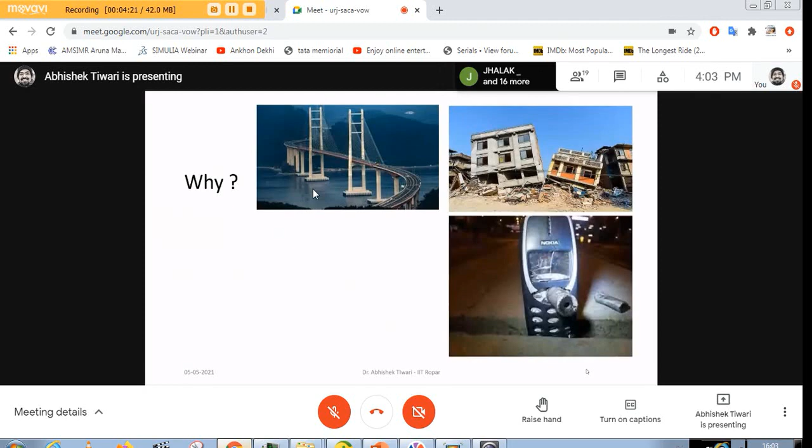Before we try to understand that, the question is why we need to understand about crack tips. Whatever components or machines we make, whether small or big, for example bridges, buildings, phone or bone, everything has some structural component to it and they are prone to fracture. Even semiconductors can undergo thermal strain and can fail. So we need to know when the material will fail and how much time we have to repair it, replace it, or run away from it. This is the importance of structural integrity, and I will share an example with you which is not too bad.

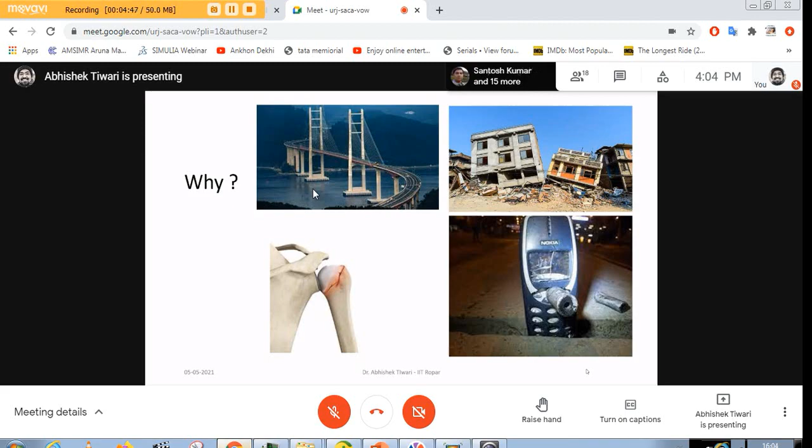A flight on April 28, 1988 takes off from Hilo Airport. This flight used to fly to Honolulu Airport at least 10 times a day because the distance between these two airports is very short, just 350 kilometers away. So it used to hop on and off 10 times at least. And on April 28, after 20 minutes of taking off, the upper frame of this aircraft flew away.

One of the flight attendants, who was 58 years old and on the verge of retirement, was also sucked away into the sky. This was not a very fatal accident because nobody else died, so there was only one casualty. The pilot decided to do an emergency landing at Kahului airport, which is in the middle, and he saved all of them.

So these are the things - not only aircraft, but other components too - where we need to understand that if there is a flaw, what can we do about it and what are our options. In order to understand that, we need to understand the behavior of the flaw. The fail-safe design approach assumes and accepts the idea that there will always be a flaw, or more than one flaw, in the system. And therefore fracture mechanics begins with the idea that we have a crack.

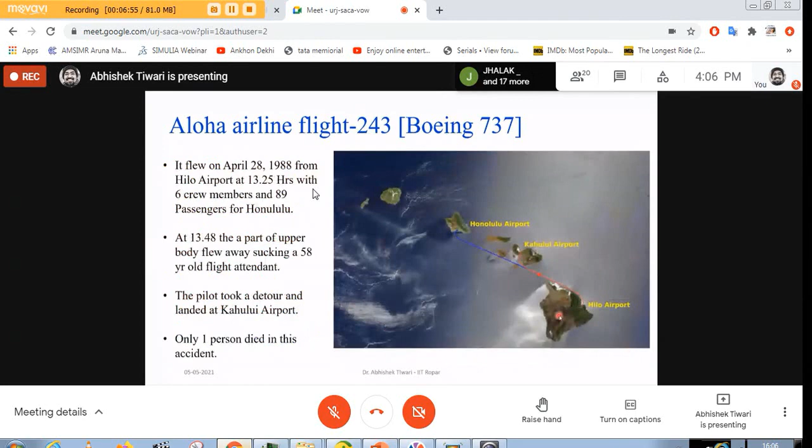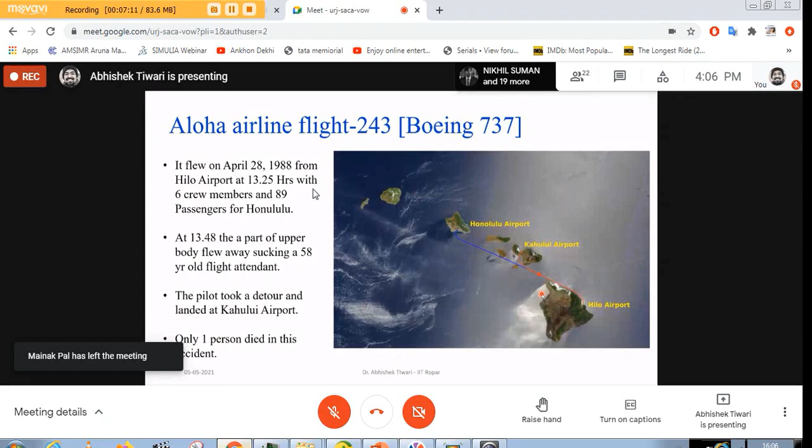So let us look at a little history of fracture mechanics. I didn't explain the mechanism of why this aircraft failed. As I told you, this flight used to do frequent jumps between these two airports in very short duration. Whenever a flight takes off and lands, the cabin of the aircraft goes under a compression and decompression cycle to match the same atmospheric pressure as on the ground, and this causes cyclic loading on the body of the aircraft.

Usually the cyclic loading is on the wings and on the turbine blades. Apart from cyclic loading, we also have higher temperatures in the jet engines. But in this case, the body failed, and it failed because of the compression-decompression cycle. If you look at the amount of flight hours this aircraft had, it was approximately 35,500, and that is not a huge amount of flight hours for an aircraft to fail.

But in this short span of time for which the craft was in the sky, it went through approximately 90,000 compression decompression cycles. And the add-on was the harsh environment of the sea, so you have a lot of salt and moisture in the air which assists the damage which starts because of the cyclic loading. So this is why it happened.

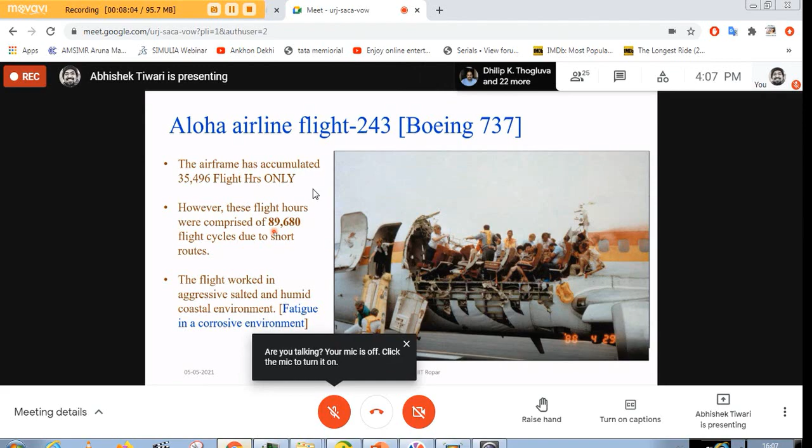If we try to find out the first documentation of any experiment for the fracture of a material, we find it in the notebook of Leonardo da Vinci in the 1500s. In this experiment we have a wire hanging with a bucket, and sand is being poured through a small hole in the bucket. There is a big hole dug beneath the wire so that when the wire fails, the bucket with the sand will fall into it and we will not lose any of the sand. When it fails, we can measure the amount of sand which caused the wire to fail, and then we know the fracture stress.

But fracture is a very common phenomena, so it cannot be true that it started in the 1500s. It is as common as an apple falling on somebody's head, because if the head is not there, it will fall on the ground and it will fracture.

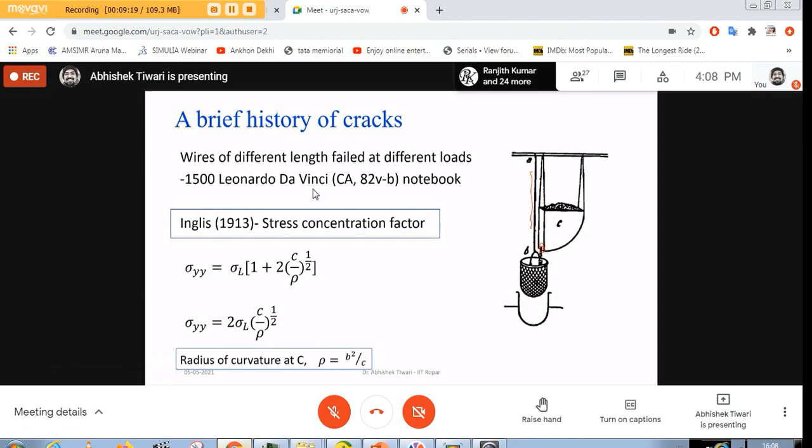But the first flaw-based analysis we find in 1913, when Inglis uses theory of elasticity for a finite radii flaw which looks like an ellipse. This is the flaw in the material which has major and minor radii of B and C. He says that if you apply a load on this structure, the load is concentrated at the tips of this flaw, and the amount by which it will be concentrated is given by the geometry of the flaw.

But so far Inglis is talking about a flaw which is finite, so it is like a hole, not a crack. The usual cracks are very sharp, and for sharp cracks this radii tends to zero. In that case the damage will be severe, so we need to understand what happens when there is a sharp crack.

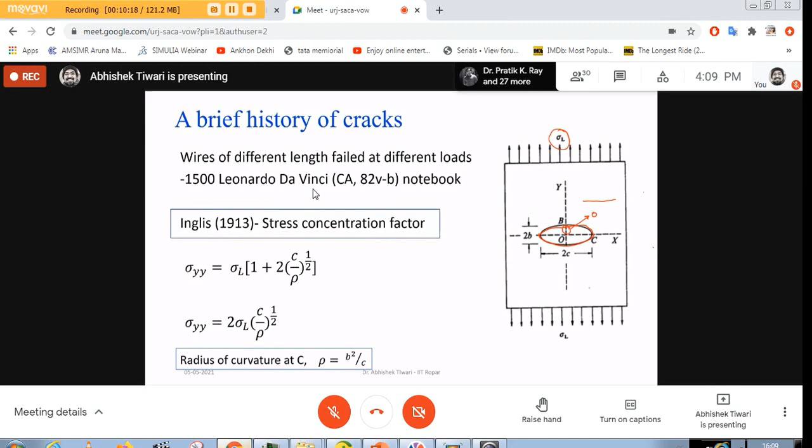And that comes when A. A. Griffith applies the law of thermodynamics in the field of fracture. The idea is very simple, and usually ideas are very simple - it just takes somebody to think and apply it, and that's what Griffith did.

He said that we are applying some amount of energy to the system, and because of this the system is failing. So the energy we are giving to the system is going into creation of two new surfaces. There is a block of material, we apply load on it, and this block breaks into two pieces, creating two new surfaces. In order to create these new surfaces, we need some amount of energy, and that energy is coming from what we are applying.

He equates it and gets the fracture stress criteria. But we already get a signal of what will come in the future - if you multiply the denominator on the left hand side, you get something on the right hand side which is a material property. Young's modulus is a material constant, and surface energy is also a material constant.

So the left hand side is telling you about a material property, which comes up when George Irwin starts working on fracture in 1948. He uses Griffith's idea and finds that what Griffith said is not valid - he used Griffith's equation and it is not giving the solution.

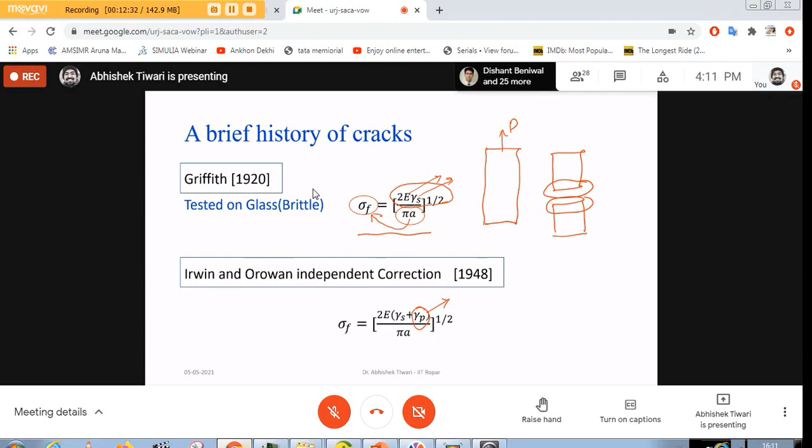The reason was that Griffith was working on brittle materials like glass, while George Irwin, who used to work in the Navy, was working on steels and cast irons, which are not as brittle as glass. He found that there is some amount of energy which the material is consuming and not going to give back - that energy is permanently going into the system. He adds that plastic energy, and we will see how this plastic energy causes problems in later solutions.

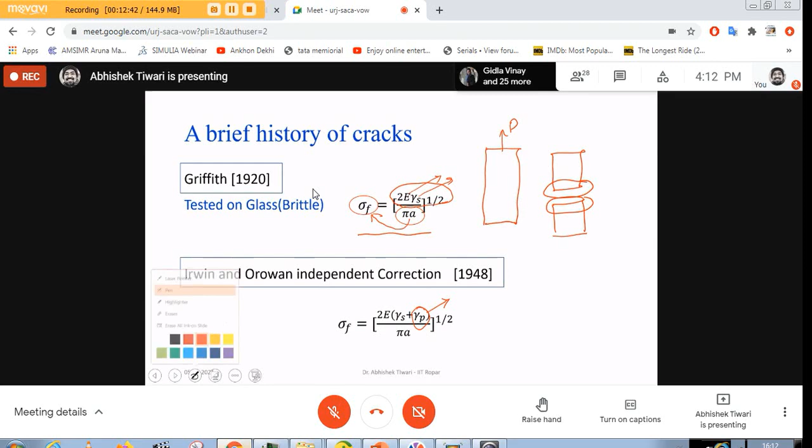Then George Irwin goes further and develops the stress and strain behavior for a sharp crack, and he finds that for every stress expression we get a common term. This is common in all the stress expressions - of course there is a dependency on the angle theta, but apart from that, this term is common.

He calls this one sigma root pi a, which is what we saw as a signal in Griffith's analysis, a stress intensity factor. It's called a stress intensity factor because by this much amount, the stress is being intensified. The other important parameter is R.

When you approach closer to the crack tip, R will be 0 somewhere here. When you go closer to the crack tip, the stress goes to infinity. That means the material is taking infinite load, and if that's true, we can fight gods, because material cannot break if it can take infinite load.

But that's not true, because somewhere it will hit plasticity. If we assume ideal plasticity, stress will not increase beyond yield strength. Therefore there is a small zone, small or larger depending on conditions, at the crack tip which is deforming plastically.

Irwin didn't know much about how to solve the equations in the plastic zone, so he said make sure your plastic zone is very small, and then you can still deal with the theory of elasticity. That idea was standardized as ASTM E399. It's also used even today for brittle materials like glasses and ceramics.

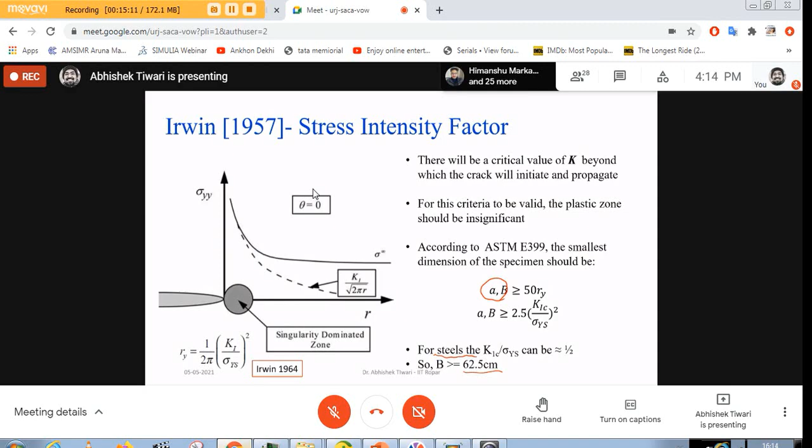Then comes the revolutionary idea of James Rice, called the J integral. This idea was not used for the first time in fracture mechanics by James Rice - it existed before in the fields of gravity and electromagnetism.

The idea is, if you have a conservative field and you take the inner product of the force in the conservative field with the radial vector increment dr along a line - imagine this blue line as the line along which we are taking this integral - that's a line integral, and the value will always be 0.

It simply says that whatever form of energy is coming in is going out, unless there is a source or sink of energy. So if we have a source of energy, we add that term. If we have a sink of energy, we subtract that term, and then that's the equation we have.

James Rice takes that and defines it as the J integral, probably because his first name was James, and he uses the same idea. Here also you see the first term is the energy stored by the material. W is strain energy density, which is simply the integration of stress over strain.

To the amount of strain you are deforming the material, you do the integration. So if you have a stress-strain diagram like this, then you simply find out this area, and that will be your strain energy density.

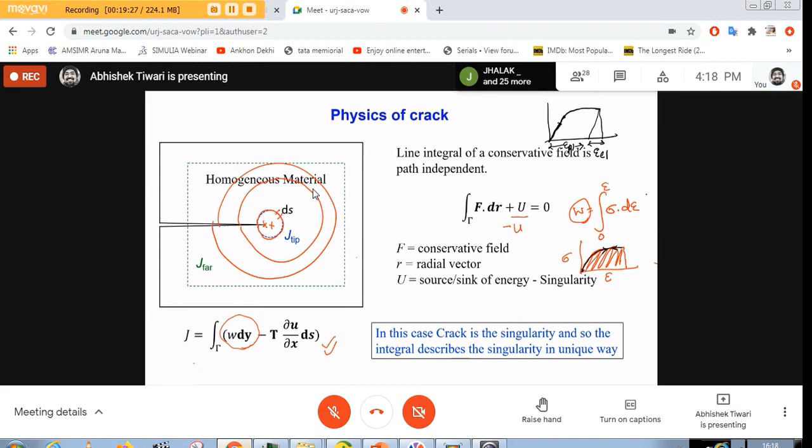To avoid that problem, Rice said assume this material to be non-linear elastic. This works as long as we are just loading it, but it breaks down when we unload it, and that's the problem. Experimentally, this integration is calculated by loading a sample, and you get a force versus displacement diagram.

We get a force versus displacement diagram, and you take the area under this curve, which is related to the energy consumed. You can change force to stress and displacement to strain, and if you do that, you get strain energy density. Since we are taking the area under the force displacement curve, we need a factor eta, and then divide by the cross section of that part of the material taking the load, and then you get the J integral experimentally.

But the problem is that we are also counting the plastic part here. The problem is that this part of the J integral is not available for the crack tip. If the crack has to move, this energy cannot be used — it is permanently taken by the material, and the material will not give it back. Only the elastic energy, which is stored, is available. So when the crack needs to grow, it needs energy, and that energy can only come from the stored elastic energy, but we are also counting plastic energy, and that's the problem.

So it is not defining the crack driving force, but it is defining the material's resistance. Plastic energy is the form by which material is responding — it is fighting back against those forces trying to break the material. So in a nutshell, this J integral will not define the true crack driving force as long as the crack grows.

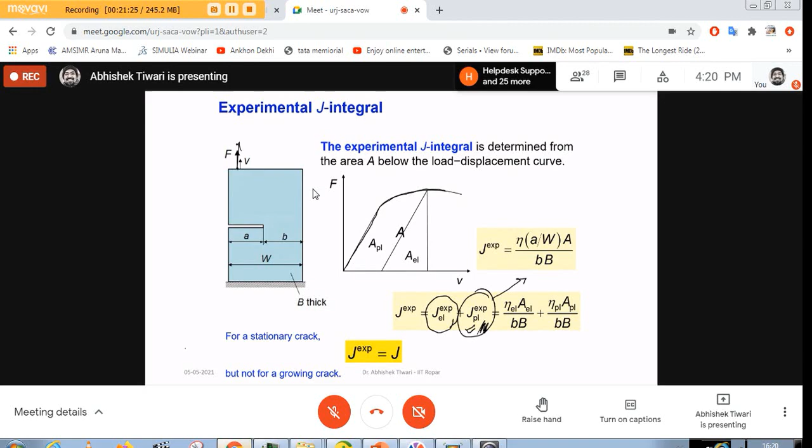But if the crack grows, then what happens? Imagine this specimen has an initial crack length of A, and then the specimen had a little bit of increment in the crack length by an amount delta A. So the crack has grown. What happens to the material point which is here, let's say?

This material point was initially there, and therefore it must have had a high stress value — some finite value. Now the crack has grown, and that material point is no longer attached to the point on the other side, so the stress value there is 0. This means there has been an unloading, and unloading is not allowed in this concept.

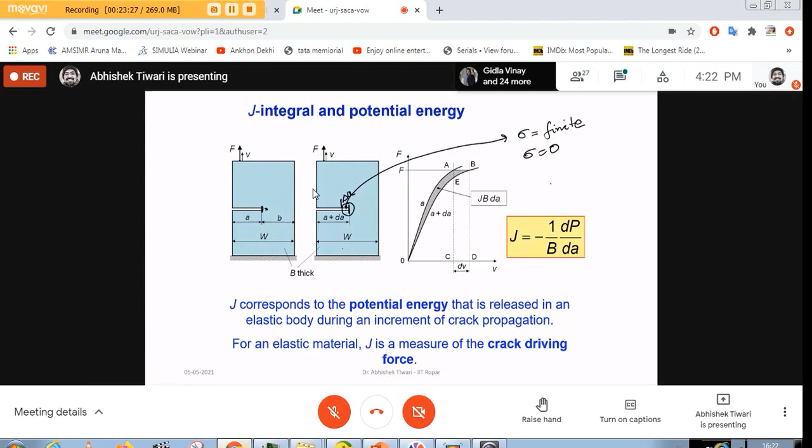And that is where there is a problem. Now let us look at what I explained, that was the experimental part. If we have to calculate this J integral numerically, we can simply apply this equation in finite element analysis software, and calculate terms like W, which is strain energy density, and T, which is traction. All those other terms I have already defined. All this data you can straight away get from finite element software, and calculate this J integral.

But because J integral assumes this material to be non-linear elastic, it takes the whole area under the stress strain curve. But only this part is available for an elastic plastic material for the crack to grow. So if you have to take it, you should only take elastic strain energy density. But in that case, the definition of J integral will face a lot of problems.

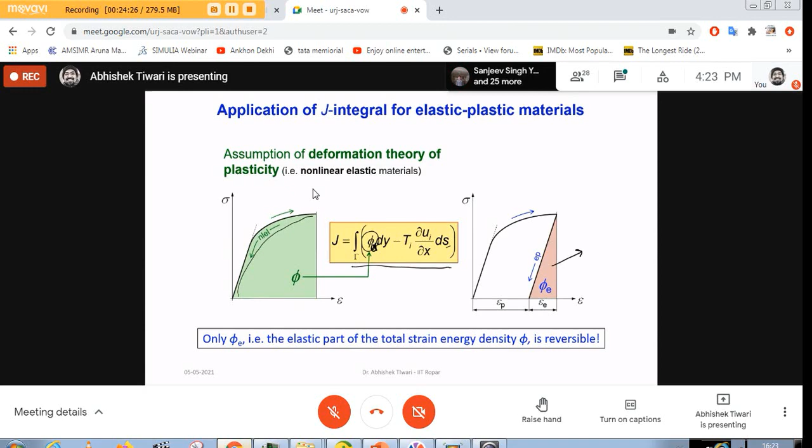So the solution which we are proposing, okay, before that we need to have something in mind. We have talked about the problem with the J integral. Let us understand that the amount of energy available at the crack tip, which is the true crack driving force, let us call that J integral. The conventional J integral has some problems we have discussed. This crack driving force available at the crack tip, if it is greater than the resistance which the material is offering, then the crack will grow, and if it is lower than that, the crack will not grow. This is not very hard to accept. And now

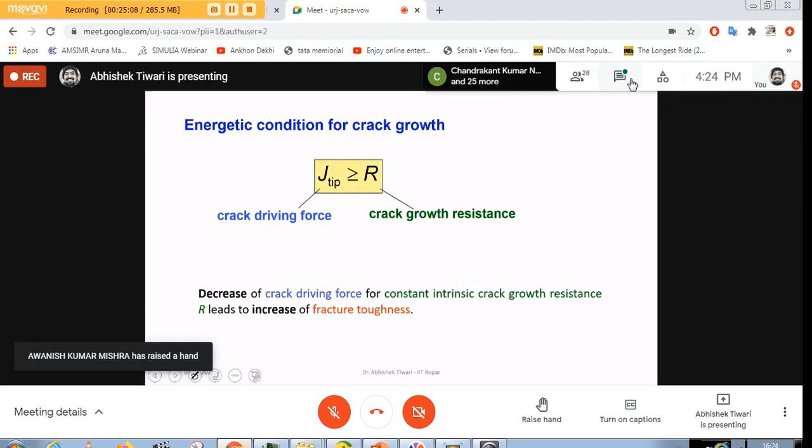Okay, so now let us look at the solution. The solution is coming from configurational forces. The name might sound very difficult, or maybe not, but this idea has been applied in many other fields. In the field of fracture mechanics, this is new. The idea came long back in 1956 when Eshelby talked about the energy momentum tensor, and we call that configurational stress.

And what is this force? This configurational force is not new, we all know what kind of force it is. For any entity, if there are two situations where that same entity can have a stage with lower energy, it will always try to go there. So if we have water at an elevation, this water will always try to go to ground zero. Because of this energy difference, we will always have a force which compels this water to go down, but this cannot happen as long as I don't put a hole in it. If I don't put a hole, it has to stay there. So there is a force on the system, but it cannot do anything because there is no path.

And this force is the configurational force in continuum mechanics. So if you assume an interstitial atom inside a material, I will not call this interstitial atom very sad, but it is also not in the happiest situation, because there are bigger atoms trying to compress it. They don't want it, they want the void to be void. If this interstitial atom goes to the surface, at least half of the side will be compression free. So there exists a situation where this atom can be a little happier, and therefore there will be a force on it which compels this atom to go to the surface. Whether or not it goes to the surface depends on if there is a path provided to it.

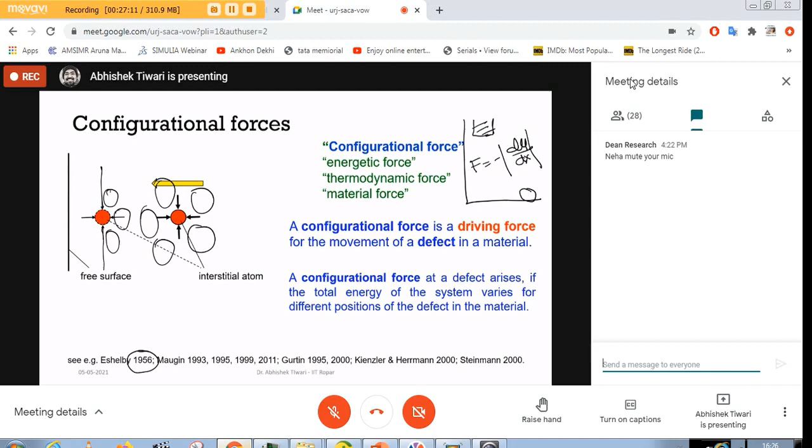And that is in a nutshell what configurational forces are. We calculate configurational forces from the configurational stress tensor, which is also the energy momentum tensor of Eshelby, and it is not very difficult. So we have strain energy density multiplied by the identity tensor, and then deformation gradient transpose and first Piola-Kirchhoff stress. It is similar to the J integral. The first term is the energy stored in the material, and the second term is the energy provided to the material. And if you take a divergence of this term, the divergence of any property tells you about the inwardness or outwardness of that.

If the divergence of that value is zero, it means the property is neither showing inwardness nor outwardness, so there is a balance. If there is a balance, then there is no force. If there is no balance, then there is a force, and that force is the configurational force. For different situations, like at the crack tip and at the surface, the terms in the equation change a little bit, but the basic idea is in this equation. And if you compare it with the J integral, it is the same.

Advantage here is that we have not assumed anything about the material or the loading type. We are not saying that the material has to be elastic or non-linear elastic. The material can be deforming in any way, and there can be unloading, there can be creep deformation, and therefore this concept is valid under any type of deformation: creep, viscoelasticity, elastic, plastic, or completely elastic.

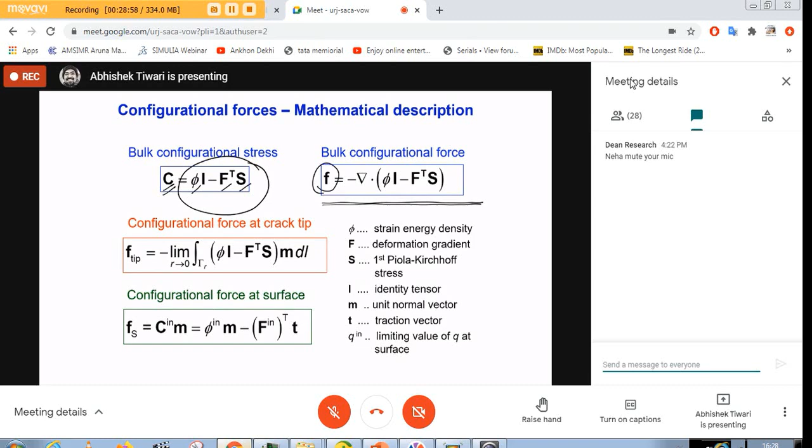So this is how we calculate configurational forces in finite element analysis, and then we sum it over. Let us say that there are configurational forces here in this contour, and then we sum all those configurational forces, and that should be my driving force. So that is the sum of all the configurational forces, and that will be my crack driving force, and this is a vector.

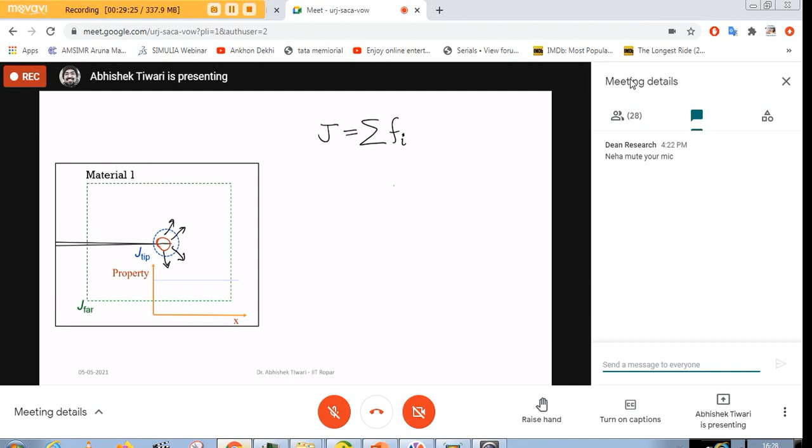So if you want to know what is the driving force in this direction, then you take the dot product with the basis vector in that direction. And this will be the Rice's J integral if we assume again the non-linear elastic condition. So then it will be same, Rice's formulation and configurational formulation will be same.

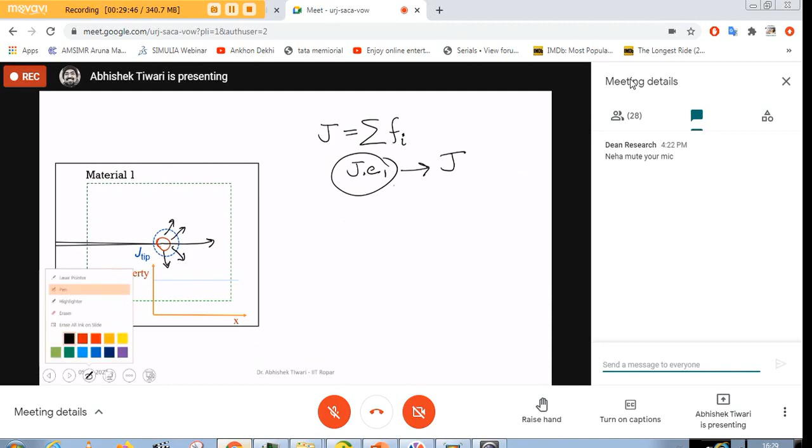So there will be no configurational forces here because there is only one singularity, right? Everywhere else the divergence is getting balanced, and at the tip it is not getting balanced. So we always have one force as long as the material is homogeneous. That means there is no change in the property of the material, there is no singularity, there is only one crack, and there are no holes in the system.

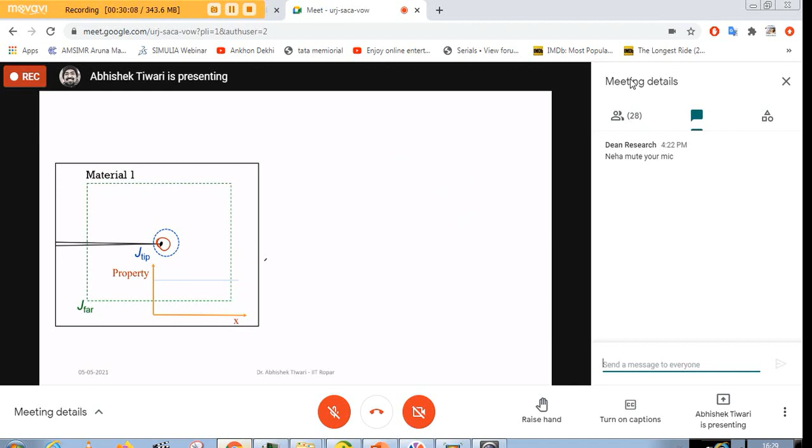But what happens if I have another material and there is a transition from material 1 to material 2? Let us say that material 1, on the left hand side, has a higher Young's modulus, and on the other side we have lower Young's modulus. So there is a change in material property, and this will cause a non-balance in the divergence, and we will have configurational forces at this interface.

Okay, now let us think. I take the contour here and I take a contour along this green line. Will I get the same value? The answer is no, because in this contour I am having only one singularity, which is the crack tip, and in the other remote contour I have two singularities: I have the interface and I have the crack tip. So in this case J integral is not path independent.

And this interface will affect the crack driving force. So what it means is that the amount of energy which I am providing is not reaching the crack tip. Somewhere it is getting distracted because of this interface here, or we call this material inhomogeneity. So if you have an interface, or if you have a hole, or if you have a particle, all of these can act as material inhomogeneity.

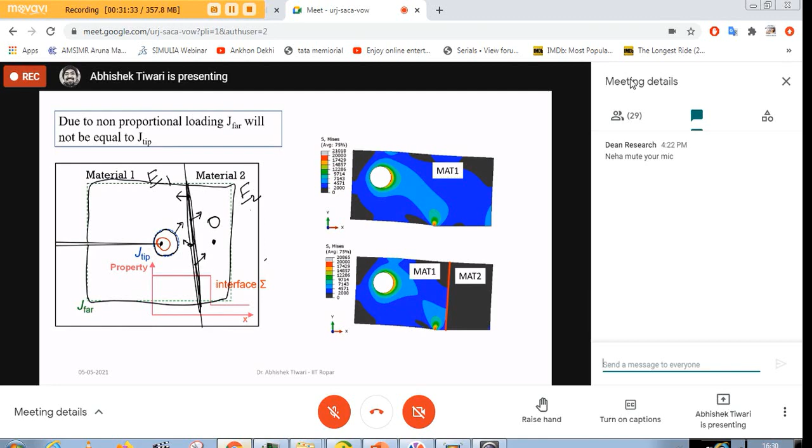And the picture will be clear in this slide. Let us assume that we start from this position and the material is completely homogeneous, and this is our contour. So what do we do? We calculate all the configurational forces in this contour and we sum it up and we find out the J integral value. And that value is some value.

Then the crack grows to this extent. We take the same size of contour which has moved now because the crack tip has moved, and then we again sum all the configurational forces and we again get the same value. So there is no inhomogeneity term, and whatever energy we are providing to the system is reaching the crack tip.

And the analogy I give you is that I'm driving a car and I'm not changing any parameters of my driving and I'm riding on a flat road. So this situation is like that.

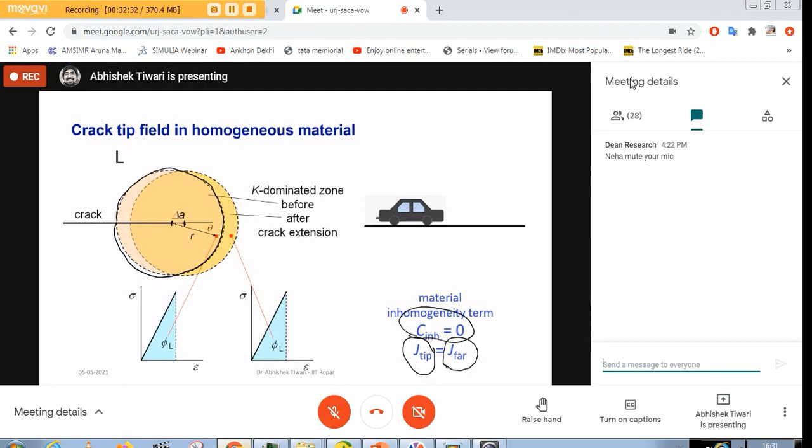But what happens when I have a transition of material? On the left hand side of this black line, I have a material which has a higher Young's modulus, and on the right hand side I have a material which has a lower Young's modulus. And now let us take this contour.

Initially I have no configurational forces except at the crack tip I get some value which is the crack driving force, J tip. Then the crack grows and now my contour intersects with some of the part on the right hand side material. So what will happen in this side? I will have less amount of energy because the elastic modulus is lower, so the area under the curve will be lower, and we are assuming elastic material only. So we will have lesser energy consumed here.

Therefore, we have a bigger contour, and that is the amount of energy which we are providing, and the same amount of energy has to reach in this contour, but because less energy is consumed in this part, more energy is available on the other part.

That means for the same amount of energy I am supplying, the crack tip is feeling more energy. So J tip is greater than what we are giving. We are not creating anything, but because of this interface this is happening. This is similar to driving the same car without changing any parameter, but then hitting a downhill road, and the velocity of the car will increase without changing anything. This is an idea which can be used to change the crack drive.

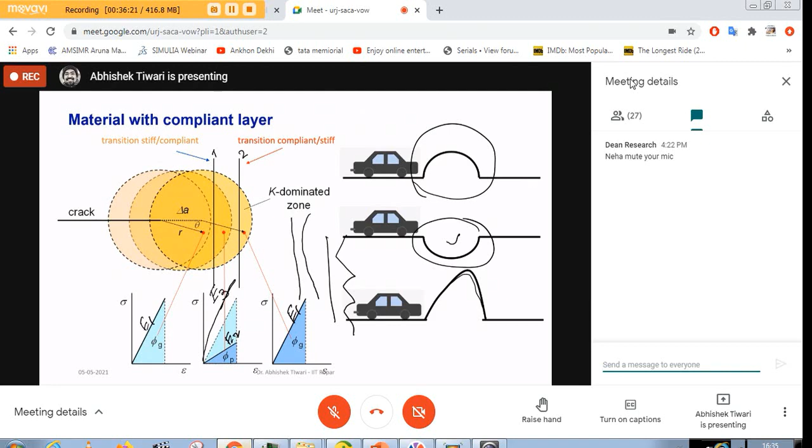Using this idea, which we call material inhomogeneity, we think we can increase the crack resistance, because I'm not changing anything in the car, just changing the road construction, and I'm able to change the velocity. So we applied this concept in polymers, where we had the matrix which was a brittle polymer. In this plot it doesn't look that brittle, but if you compare with the material we used as interlayer, then you see how much brittle it is.

We use this material as the matrix, and put a very thin interlayer of the soft material, and before doing the experiment we model it. We first model the homogeneous material using cohesive zone modeling, which we chose because it was very simple and needs only two parameters for calibration: fracture energy and the cohesive stress. Cohesive stress we can guess from a value between the yield strength and the ultimate tensile strength, and fracture energy we can guess from the initiation fracture toughness value.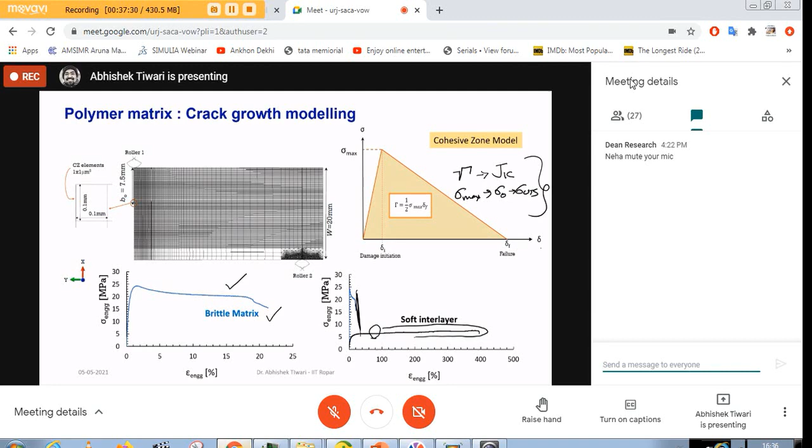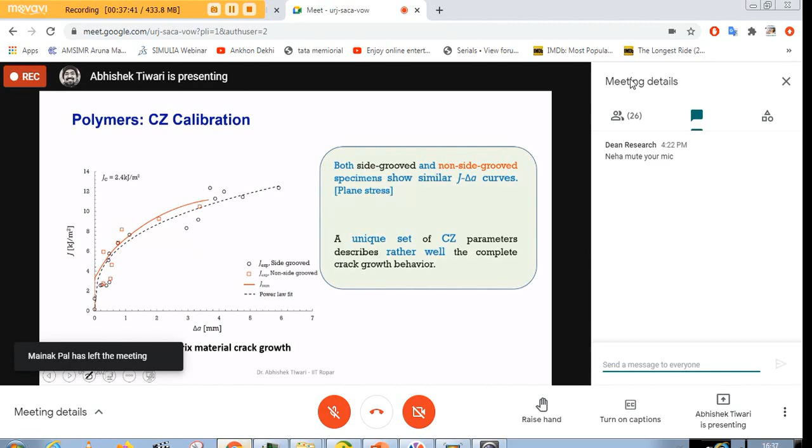We tested some homogeneous specimens, made the guess, calibrated the model, and did the simulation to find out the J delta A behavior. Finite element analysis results using configurational forces was able to describe the behavior experimentally, more or less closely. Using these parameters we modeled the composite, and could find out how much improvement in fracture toughness can happen if we put that interlayer. Experimentally it was confirmed that the fracture toughness improved by a factor of 7.

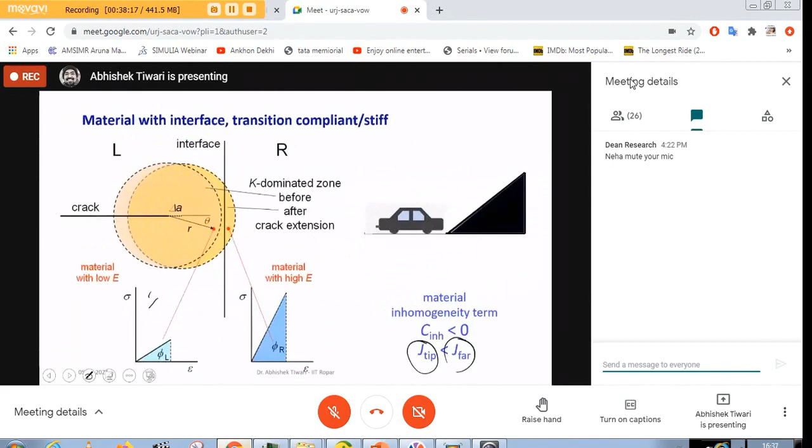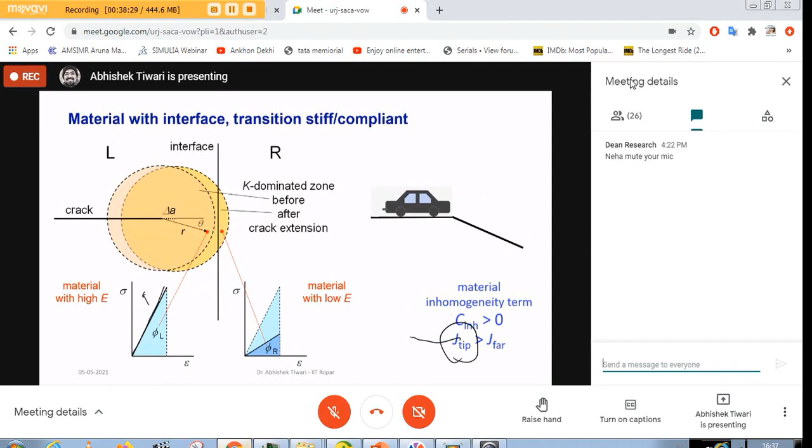Apart from that, we also saw that the crack driving force is increasing as the crack reaches the interlayer, represented by this line. This is what we saw because the material is brittle. So when we go from hard to soft, meaning the Young's modulus is higher in the hard material, the crack driving force increases, and that's what we could also see in the simulation results.

After joining IIT Ropar, I have applied this concept in creep deformation. In creep deformation, we have a close cousin of the J integral. If you remember, the J integral was simply a line integral having strain energy density, traction, displacement gradient, and the contour path. This is a close cousin of that, so whatever parameters are time dependent, we have used a rate - not us, but fracture mechanics people use the rate of that. So phi dot is simply d phi by dt, and u dot is simply del u by del t.

Remember that this is not dj by dt. It is not dj by dt. So only those terms which are time dependent have been replaced with the rates of that.

This idea works fine, and experimentally it is found to work, but the philosophy is broken somewhere, because J defines the crack driving force, at least for a stationary crack as long as we are loading it. But what does C star define? There is no theoretical answer to that.

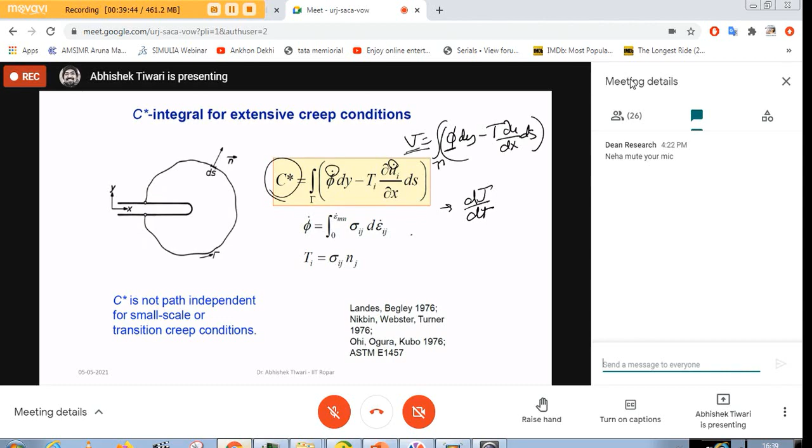It is related to the crack growth rate experimentally. You can calculate C star as you find the J integral experimentally, except that you have to change displacement to displacement rate. That's it.

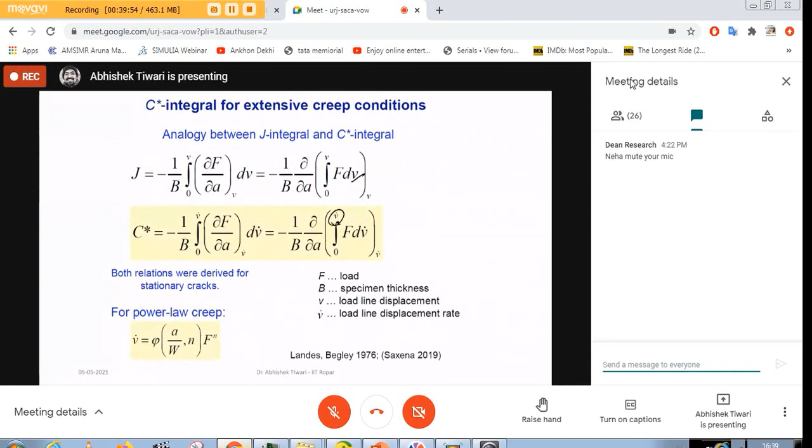Experimentally it is found that in extensive creep condition, this C star value shows a very good correlation with the crack growth velocity, but it loses the theoretical answer of what actually is defined by this parameter.

So I did some calculation in creep deformation for small scale creep, and found that this integral C star is not path independent in small scale creep. It only works in the extensive creep condition, meaning the whole specimen is creeping, only then it will work.

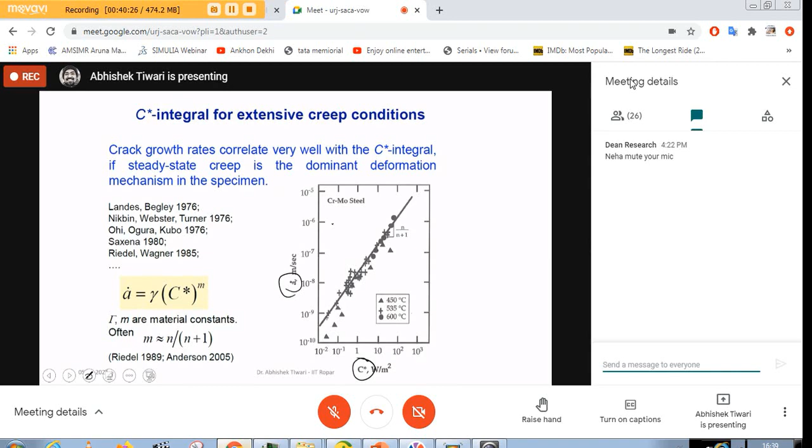So I did the simulation in small scale creep, meaning that in the earlier slides, if you remember, there was a plastic zone. In this case we have a creep zone, meaning this part of the material is deforming with time dependence and the rest of the material is deforming elastically.

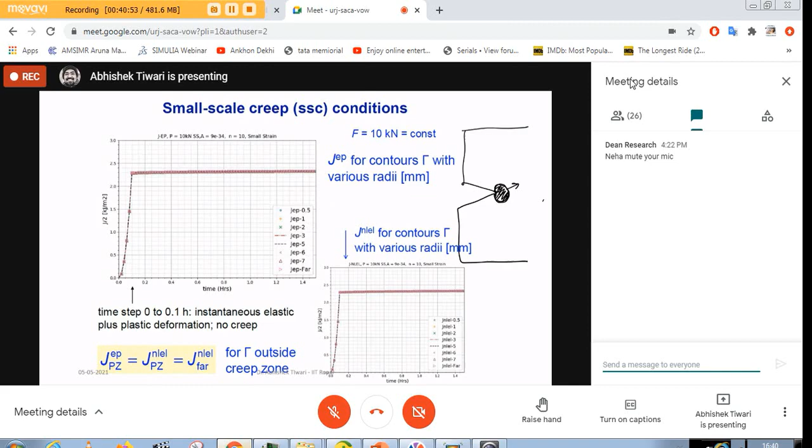For that we calculated J integral using configurational forces, and we calculated C integral with the existing concept. As I said earlier, it is found that the C integral is path dependent, so it varies if you take different amounts of contours.

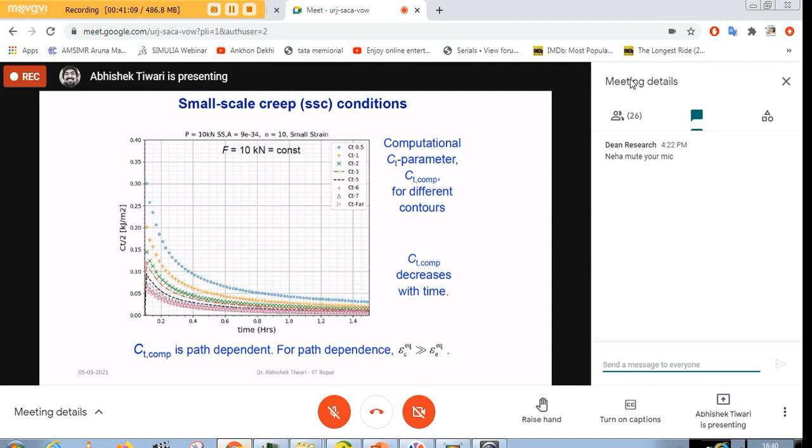So we cannot use this idea in small scale creep, at least. But if I find out the rate of change of J integral, dj by dt, it defines something, because J is the crack driving force, so the rate of change of that defines the rate of change of crack driving force with respect to time.

And this dj by dt is path independent in small scale creep, and it matches with the C star integral which you find experimentally or numerically when the time is larger.

So what happens when time is larger in creep? It means the creep strain—so you can break the total strain into elastic strain, and if there is some plasticity, then plastic strain and creep strain. Creep strain is a function of time.

So when you increase time, this part of the equation dominates. We have maximum strain contribution coming from creep, and then this integral value works, and our variable matches with this when we go for longer hour tests. But in the small scale condition also, we are able to give a better solution than what exists now.

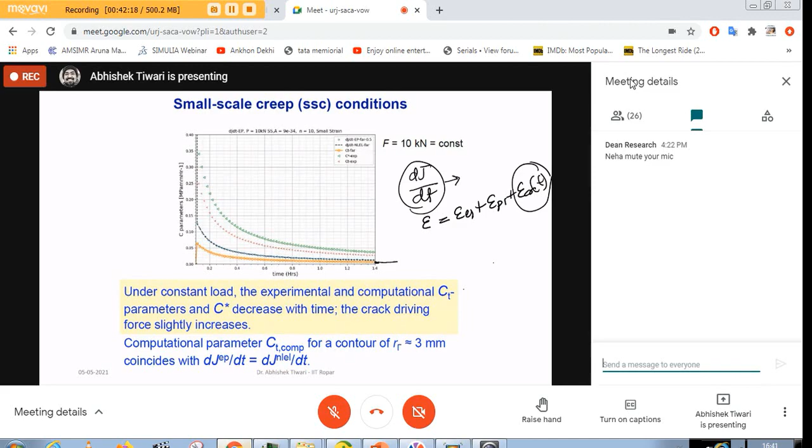So I think with that I can summarize that the configurational force idea is recently applied in the field of fracture mechanics, and it can work for any type of material, any kind of loading environment. By designing specifically how to place a transition in the material property, we can make the crack go in whatever direction we want.

So we can use this idea to deflect a crack so that the fracture toughness improves. There are some areas where it has not been applied—creep fatigue we are working on in an institute funded research project, and composite materials, and other areas. For example, ductile brittle transition is one area where configurational forces has not been applied yet.

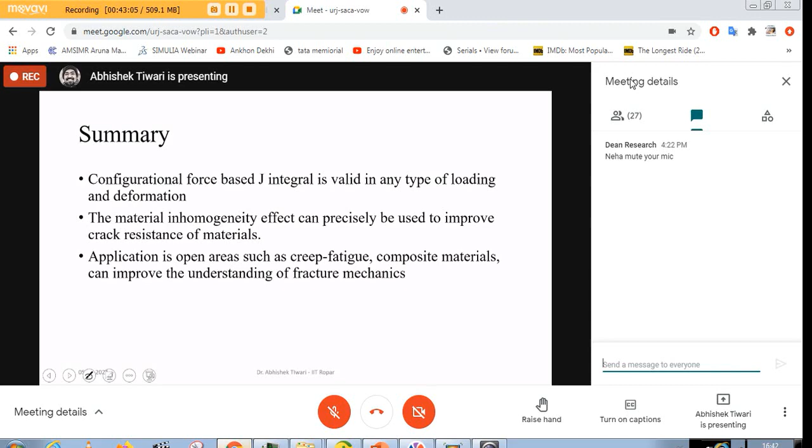So with that I finish my talk, and I thank you all for the ride, and I'll be happy to answer any question if you have.

Hello, Prof. I'm Darun from EPFL. It was quite an interesting talk, thank you very much. So I have one question: you have applied the cohesive zone model for the brittle compliant layer problem. May I know how the configurational forces theory is applied there to calculate the integral?

So are you asking how this configurational force theory is applied in cohesive zones or in the whole body? Yes, in the cohesive zone modeling that you have shown earlier.

Yeah, so we chose cohesive zone, as I said, because lesser calibration parameters are required. If you compare it with other models like GTN and others, you have 6 to 8 parameters to find out experimentally, so we were relieved with that botheration.

The configurational forces you calculate by doing post-processing, and it is elemental free. So at any nodal value or integration point, you will get the values of stresses and strains and deformation gradient, right? So using that, if you see the first equation.

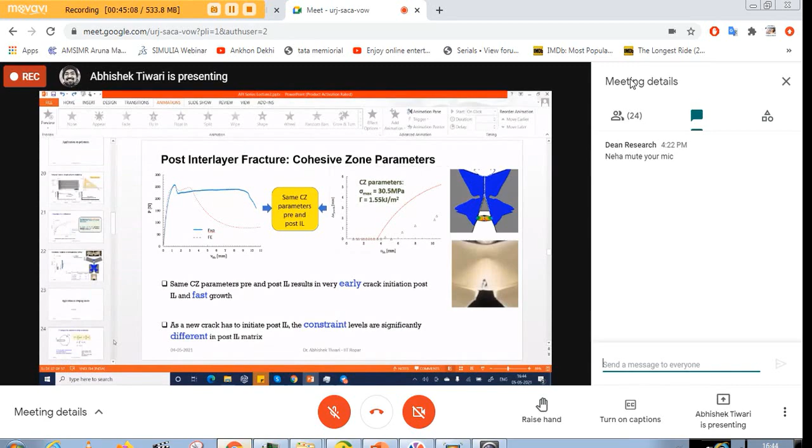So the equation was the strain energy density into identity matrix. So you have to take strain energy density, this part you can calculate with the stress and strain value at the integration point. Deformation gradient you can calculate, and first Piola-Kirchhoff also you can calculate. And the algorithm is given in one of the articles, which is open, so it can be accessed by anyone how to calculate this.

Okay, great. So it is not mesh dependent, right? So it is mesh dependent. It is mesh dependent, yeah. So sensitivity analysis has to be done. Okay, yes, thank you sir.